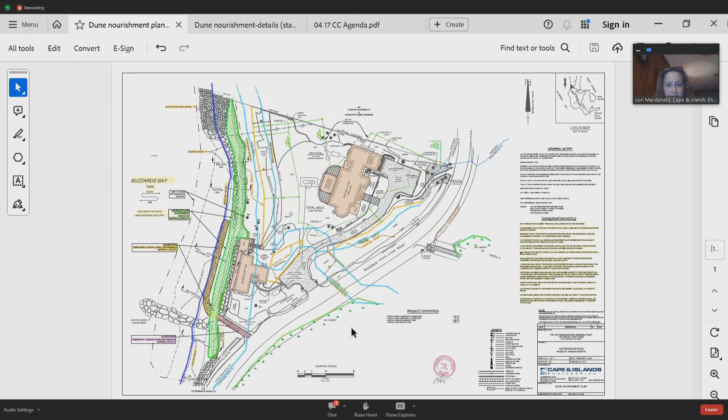Thank you, you can stop sharing. Okay, sure, yep. Sorry, I've got to figure out how to do that. So there it is, all right.

All right, Jen. Yes, Mr. Chairman, the board's seen this project, as Laura stated, multiple times in the past. I don't see the order of conditions being much different from the ones we've issued in the past.

I would recommend the board condition it so that, after the initial 200 cubic yards, if it is damaged during a storm event, then that damage be documented and submitted to the board prior to any repair of the dune, so we can keep track of how many times it's damaged.

The only other comment I have is — I'm sorry, Lori — the Falmouth Conservation Commission does not permit anything forever. Perpetuity means forever, and we just haven't made that leap yet, that we're going to forever permit something. Understood, conditions change in the field, especially along the coast. It could be quite different 5, 10, 15 years from now.

So your client can always come in for an extension. As you stated, and as it's stated in the staff report, the '95 order lasted — that dune lasted 10 years. The 2005 order lasted 5 years, to 2010, and that last order — well, the dune held for 10 years. So I think every 10 years would be fine to go back and request a new order of conditions, but you can always request an extension for a few years.

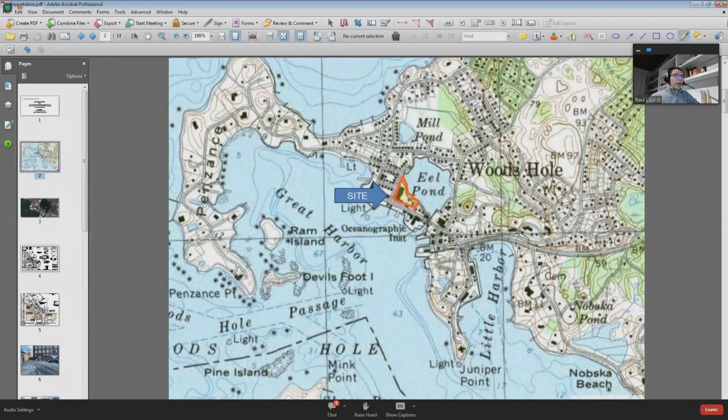This notice of intent is to permit some utility work proposed at the MBL Lillie Building facility, located in Woods Hole. I believe everybody is familiar with the site. This parcel is located between Great Harbor and Eel Pond. From an aerial viewpoint, this is the Lily Building at this location, with Eel Pond and Great Harbor nearby. The site is nestled between these two water bodies.

We filed this notice of intent with this site plan. MBL currently has two underground fuel storage tanks. This image shows one tank located in front of the garage building, and the second tank located to the side in the driveway of the garage building. Both are completely underground.

These two tanks are coming close to reaching their life expectancy, so MBL is looking to remove them and replace them with an above ground tank nestled behind the Lily Building. This building, the CSF building, houses the generator for MBL's facilities, and those two underground fuel tanks feed that generator whenever power goes out. The intent is to remove those tanks following proper procedures for removal of underground storage tanks.

This new tank is going to be above ground. The applicant proposes to install a concrete pad, shown in this detail, which will house the above ground tank, a prefab stainless steel set of stairs to access the top of the tank, and some additional accessory units for the fuel and fuel lines. All of this is within the same concrete pad located behind the Lily Building.

Between that tank and the existing generator inside this building, there's going to be some underground fuel lines. There was a question from staff about groundwater level. Groundwater at this facility is roughly elevation 1. The parking lot is roughly elevation 4 to 4.5. But if we do the installation taking advantage of low tide periods, groundwater could be at elevation -1. This fuel line is roughly 1.5 to 2 feet below the surface, so it should not be interfering with groundwater.

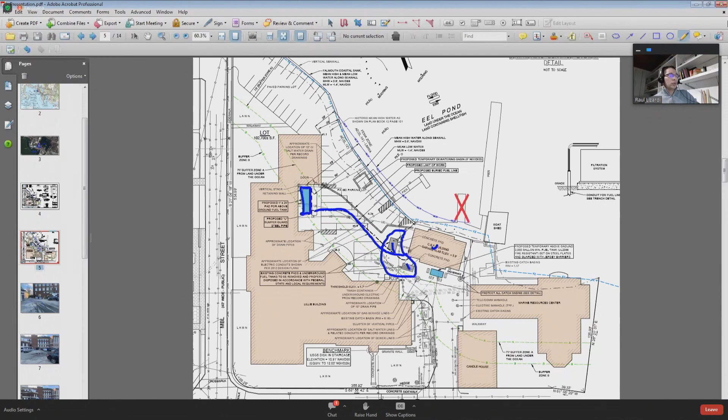The removal of these tanks, if done during the high tide period, will likely require some dewatering, so the plan does include a dewatering plan. Should that be needed, dewatering will use the same methodology as before, which is a dewatering bag contained within a filter-laid enclosure of hay bales or straw bales.

The existing site has several drainage systems, and we're proposing to protect them with silt sacks as shown in the details. We also cannot occupy the entire parking lot at MBL, since parking in Woods Hole is at a premium, so we propose to delineate only the area necessary for the work. There's going to be limited erosion control in the form of straw bales. We cannot stake them because they'll be placed on top of pavement, so we propose wrapping fabric over them and using gravel or soil to hold the fabric in place.

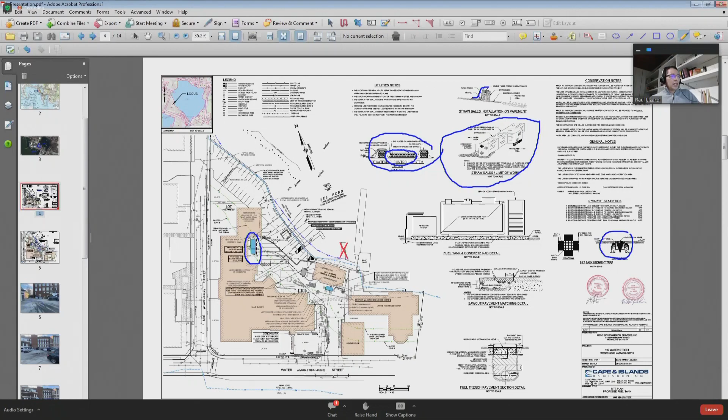And then once the installation is done and the pavement is back in place, all the erosion control measures can be taken away. So the whole purpose for this is just to replace these two subsurface tanks that are coming up to their lifespan. At that point, it will be very difficult for MBL to insure those tanks.

So having a new tank above ground is the better option for them. And in the transition between removal and installation of the new one, there will be a temporary 2,000-gallon above ground tank. The new tank is capable of 6,000 gallons, and that should be sufficient for the needs of MBL. If there are any questions, I'll be happy to answer, and Greg is also with us in case there are any specific questions for him.

All right, Mr. Murphy, do you want to add anything at this point? Okay, can you hear me okay? Yes. So Raul, thank you for that.

My only two cents is that currently there are two separate generators on the second floor of that building. Each generator is served independently by one of those underground tanks—one tank supplies one generator, another tank supplies the other generator. What we're looking to do is take those two tanks out and have one uniform fuel supply across the parking lot that will supply fuel to those two generators. The fuel will be up on the second floor of that building. Each generator has a small day tank, so the generator draws and returns fuel from an individual day tank.

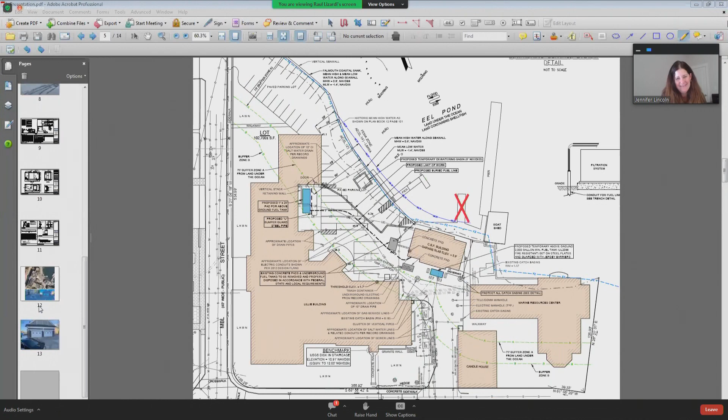If the commission agrees to and wants it, we can provide an equivalency in natives. We can't lose pavement because we can't lose parking, and the pavement goes all the way to the wall. So I guess I will probably hear what the commissioners feel about what is an appropriate offset for this. That's all I have, Mr. Chairman.

All righty. Alyssa? Thank you. I guess my only comment about potential shrubs is there is a little patch on the northern side. When you start hitting MBL Street, there's a little bit of lawn, maybe a couple shrubs. That's just my two cents. Thank you.

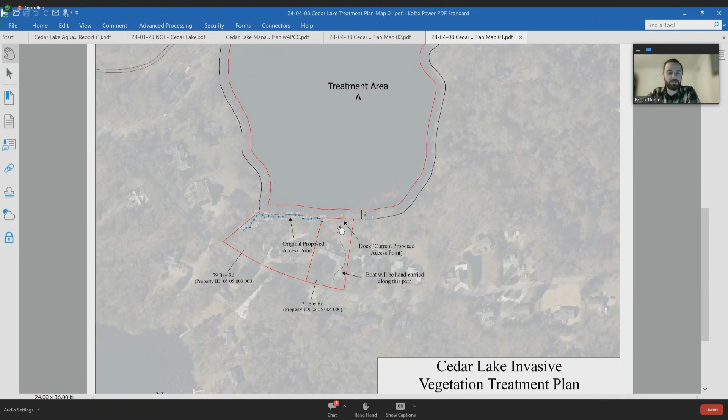They have a dock that we could use, so we would not have to walk through any wetlands. Even if there were wetlands to walk through, it'd be pretty minimal, very little disturbance. We would be hand carrying a small boat onto the dock and accessing the boat through there. All treatment would occur from the boat on the lake.

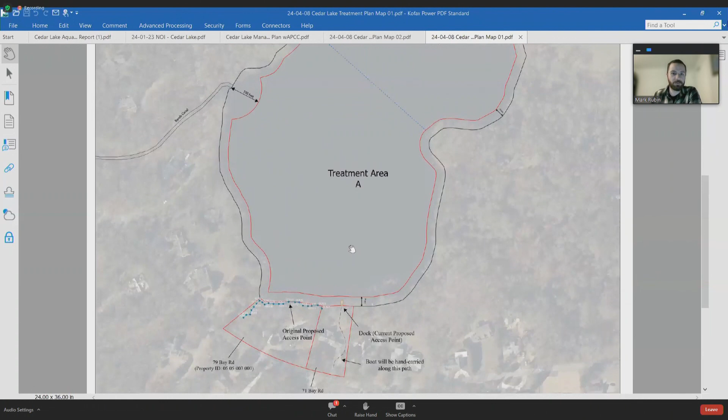On the advisement of the Division of Marine Fisheries, we have reduced our treatment areas to less than 50% of the lake each year. So we've got the lake divided into two treatment areas. First year, we would treat treatment area A. Second year, we would cover treatment area B.

In addition to that, we would avoid the littoral area, giving a buffer zone of about 30 feet all the way around the pond. At the point where Rand's Canal connects with the lake, which is the route the diadromous fish use, we would expand that buffer to 100 feet. In addition, any areas with a depth of less than 3 feet, we would not treat those directly either.

And so the first year of treatment, we would primarily just be using Sonar, fluridone. At the end of that year of treatment, we would be issuing reports to the Division of Marine Fisheries and the Commission covering any changes in the abundance of target and non-target vegetation.

They would include water quality monitoring results. Those water monitoring would take place both before and after treatment, so there would be fairly extensive monitoring during the entire course of treatment. That would be included in reports. This would also include any fish kill incidences if they happened, and recommendations for further treatment.

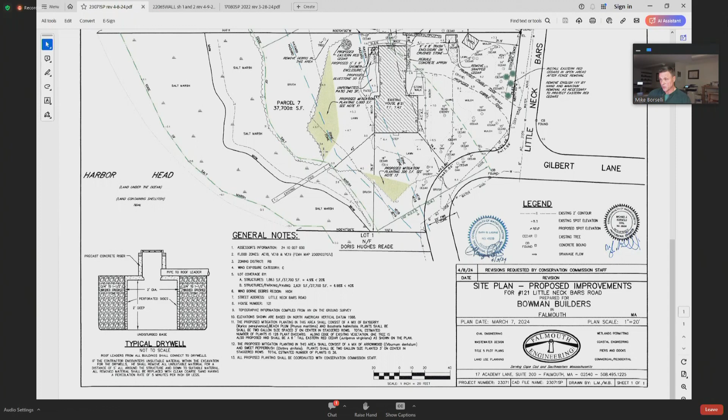And also, because of unpermitted patio construction and the installation of the new rinse station, we had to mitigate, and we proposed 1,000 square feet of mitigation planting, which is shown here in green. Subsequent to the site meeting with Alyssa and Fallon, we made a few minor edits, and I'm going to walk you through those briefly.

First of all, our initial plan had too many cedar trees, which is not very common to say, but too many cedar trees proposed to act as a screen here. Because there's already a grove of cedar trees, the number we had proposed was going to be too crowded. So we thinned out what was proposed, and we're showing four that would be staggered and planted in between the existing ones to screen out the property from Little Neck Bars Road. So that change was made.

We added a note to remove some debris—there's some firewood and brush stacked here that should be removed. There was an older permit that required an area to be planted because of when the shed was originally proposed, and it doesn't appear the planting occurred. So we've shaded this area green and are proposing an additional 300 square feet of mitigation to plant into this area. I think the original amount was 80 square feet, but there's an open area here that we agreed made sense to plant to enhance the buffer to the salt marsh.

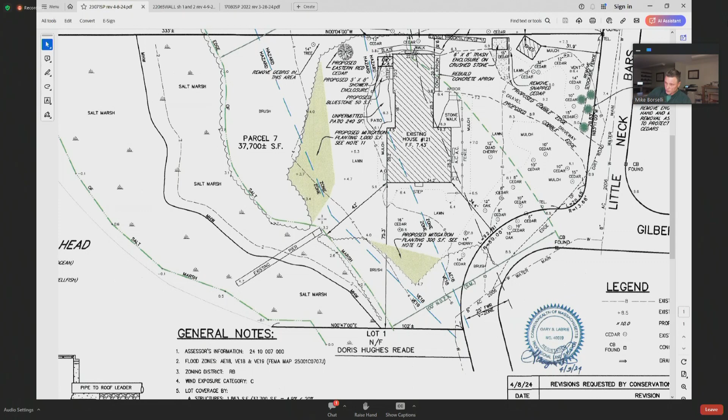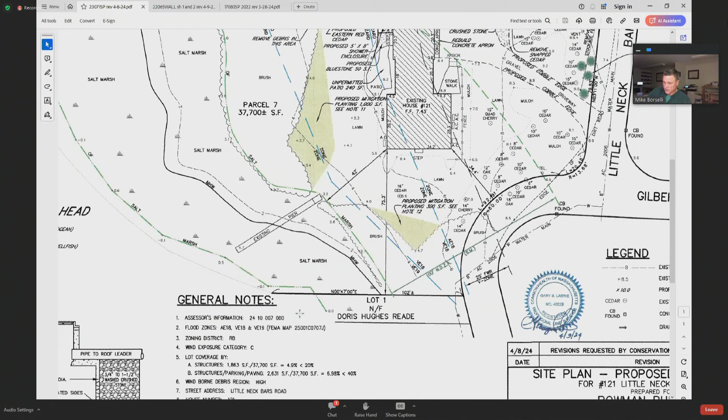We modified the planting notes for this larger area because of its proximity to the salt marsh. Your staff recommended we be specific about plants closest to the salt marsh, and we added notes about using Baccharis, since that's a predominant species here. So we touched up the notes on the plan, and we also added a note that the planting would be coordinated with staff prior to installation. I think that sums it up.

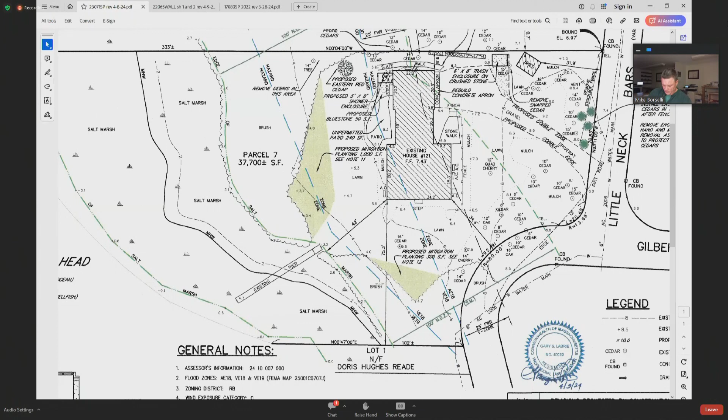I'm happy to take questions. Thanks, Mike. Jen? No, I think Mike addressed all of the staff's concerns. And yes, Mike, there is a thing that sometimes there are too many trees—it's a rare thing, but sometimes it's a thing. We want them to grow, we want them to be happy and grow and not just be all shoved together. Understood. Thanks, Mike, I appreciate you working with Alyssa and Fallon.

All right, Alyssa? No other questions. Thank you. All right, commissioner comments, Steve?

No, thank you for responding to the staff's request. I have no further questions. Betsy? Nor do I. Courtney? Me neither. Maury? I really don't have anything, but it's not in the DCPC, just outside. Ron? No, I have no questions or comments. I'm happy with it.

Jen, is there anything in the public chat function, please? Nothing in the public chat, Mr. Chairman. Thank you. Then I'm going to make a motion to close this hearing and take it under advisement.

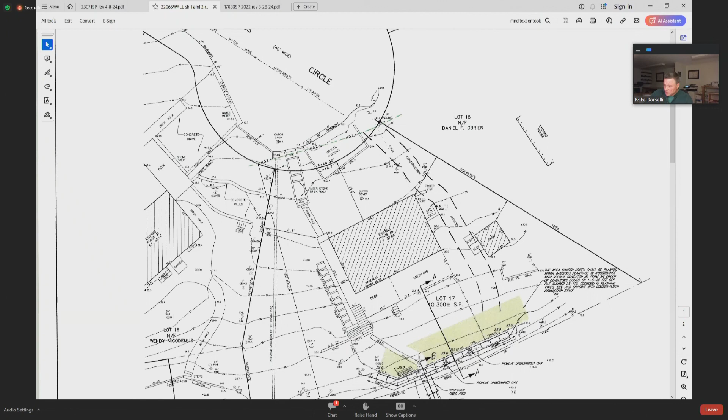The reason the hearing was continued mainly was to give us an opportunity to take a recommendation where we could reduce the amount of fill that would be proposed behind the wall. Originally, this wall was one additional block high. So we looked at that with Jen at the office, and it was suggested that that would be a good compromise, and it would reduce the amount of fill behind the wall significantly, but it would still serve the purpose of stabilizing that slope.

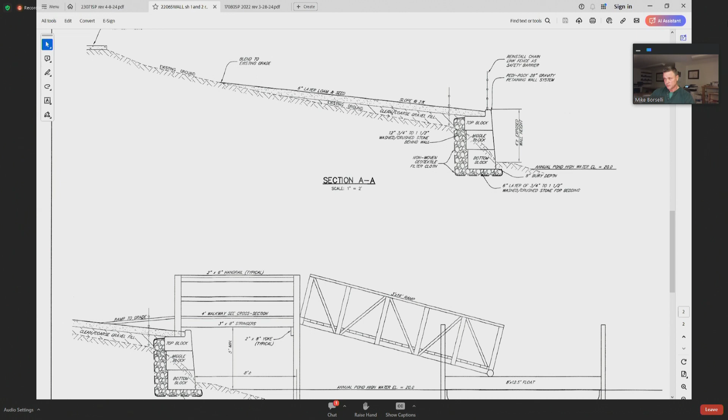So it's a relatively small amount of fill. It'll allow the only yard area for the family to be a little bit more level, so they have an outside recreation area between the house and the pond, and make for a good place to propose the dock.

Here's a cross section of what is proposed for the dock. It's basically an 8-foot elevated section of timber that would accept a ramp, and then there'd be an 8 by 12.5 foot long float, which is 100 square feet, the maximum allowed.

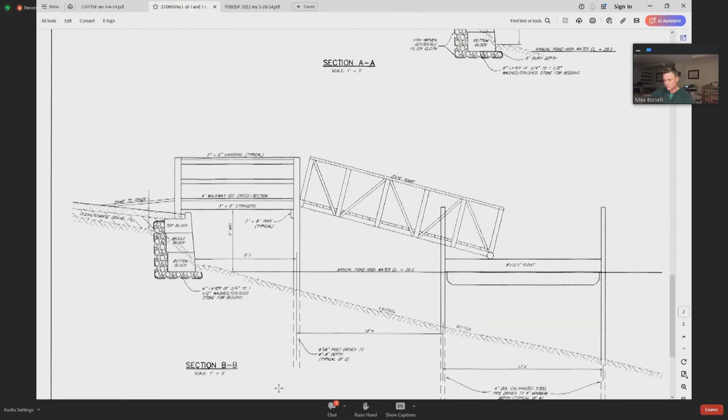That is shown in plan view here. There's a small elevated portion, then the ramp, and then the 8 by 12.5 foot float that would be sited in this position.

There's surprisingly a lot of water depth here. It's over 4 feet at the landward end, and it's 7.5 feet at the seaward end.

During the review, we were informed, unaware that there had been an original order of conditions for previous work performed back in the 80s or late 80s, early 90s, that required a buffer strip of native planting. The original plans we proposed did not show that. That planting is not in place today. Your staff, on a site visit, not only found the old documentation, they observed there's no native plantings, no 10-foot wide native planting strip.

My client wasn't even aware of that condition; it was a previous owner. My client purchased the property in the recent past, I don't know exactly when. I informed him of this, and he's accepting of that. So part of our application includes planting that buffer to the pond.

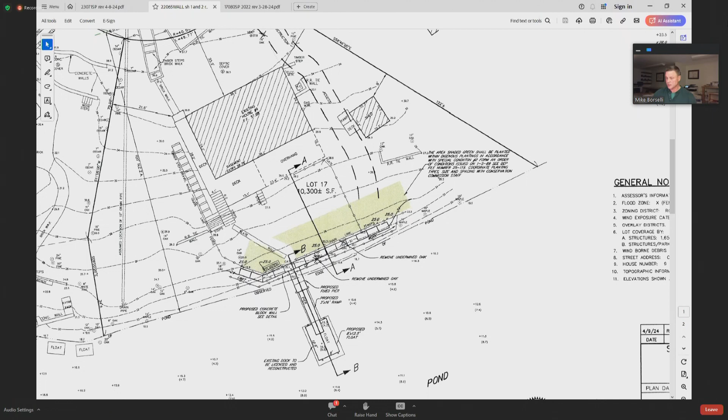Thanks, Mike. Jen? I have no comments, Mr. Chairman. Alyssa? My only comment is, Mike, at your convenience, if you can get us a copy of that stamped plan with the buffer strip on it—I think we're just missing a hard copy. Yes, I emailed it to you; I may not have delivered a hard copy. Okay, thank you.

All right, Commissioner comments, Betsy? I like this version better. Thanks, Mike. That reveals the commissioner who had comments. Right from the site. I called up Jen, we're surprised. Jen wouldn't give you up, but I had my suspicions. Well, yeah, I could see a couple other people it could have been too. But this came up and I'm like, what was it that I had a problem with this? And then I realized.

Oh, boy. Courtney? That's all I have. Thanks, Jamie, no questions. That's plenty. Kevin? No questions, Mr. Chairman. Maury? No questions. Thank you, Mike, for the upgrade. Ron? No questions or comments. Thank you. Steve? Thank you, Betsy, for setting them straight. No comments or questions. I know you or Maury or maybe Courtney even would have questioned that amount of fill. Yeah, I should have. Thank you for including me.

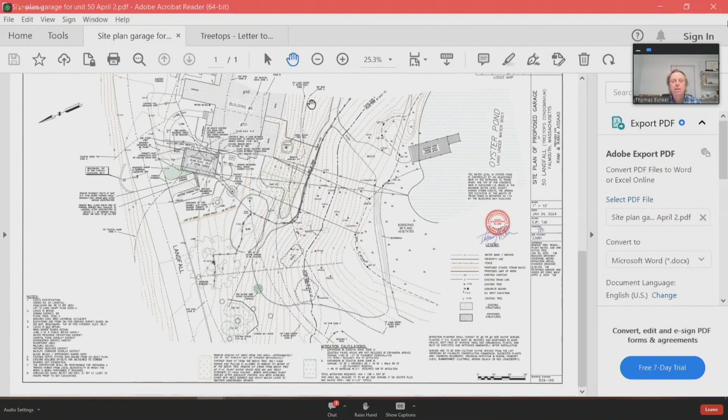One, they were concerned with the process of attaching to or cutting into the foundation of the house, being a condominium. They didn't want that to possibly run into any problems, so they wanted the garage detached from the structure.

So what we've done is pulled it away from the building and made it narrower. It was 14 3/4 feet, so it's 1.25 feet narrower than it was, with a 3-foot space between the building and the garage. There's still enough room within the existing paving to put in a 9 by 18 parking space in this location. The existing wall runs at more of an angle, so that wall will be moved, built back at an angle parallel with the pavement, making it a rectangular 9 by 18 parking space.

There's a shrub and perennial landscape bed here. And of course the driveway has moved 3 feet down along with the garage. There's still a stone step, and the association suggested a so-called person door on the side of the garage, so we added a bituminous concrete walk over this length.

Several years ago there was a drainage project around the whole area, and there's a PVC drain pipe running right through here that will be rerouted between the two buildings. Once the foundation is in, there'll be a short, 3-foot retaining wall here so there isn't a slope that might cause runoff downhill. From that retaining wall it can slope back slightly toward the roadway, or infiltrate. Four downspouts will connect into this rerouted drain pipe, and a second leaching pit will be put in this location for the added roof area.

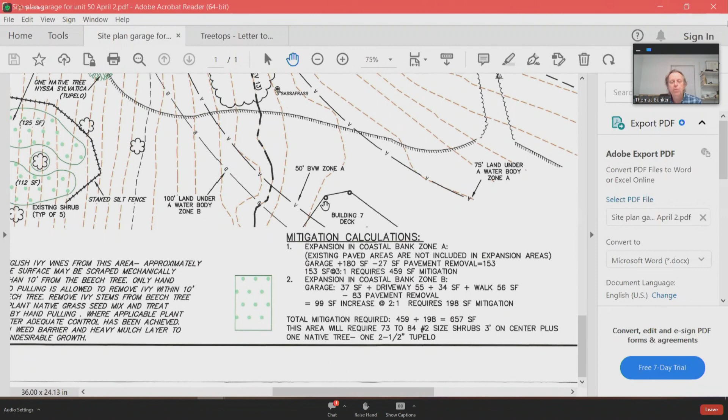The mitigation calculations come out to needing 657 square feet of native planting. At one time there was a full circle around it, but going back and forth the calculations showed slightly less mitigation needed. So we have two areas: 237 square feet of mitigation here, around some existing viburnum shrubs that were already planted - native shrubs to go around them without interfering with what's already there - and then this area has 420 square feet only, maintaining a 4-foot wide walkway through here.

The ivy, I think, was already done, but the note for that was changed so it could only be mechanical removal out here, but hand removal in this location and within proximity of the beech tree, and of course removing all the ivy vines from the beech tree by hand. So those are the changes we made, and I'll take any questions.

Thanks, Tom. Jen? Yes, Mr. Chairman - Tom, I don't have any concerns or comments with the redesigned mitigation. Although the comment letter says the Treetops board approves these mitigation provisions, your client still has to enter into an easement agreement with the board. We'll condition the project so that until we receive a copy of that easement and approval agreement, we will not sign off on the building permit. Okay, fine, thank you for that - no further questions, Mr. Chairman.

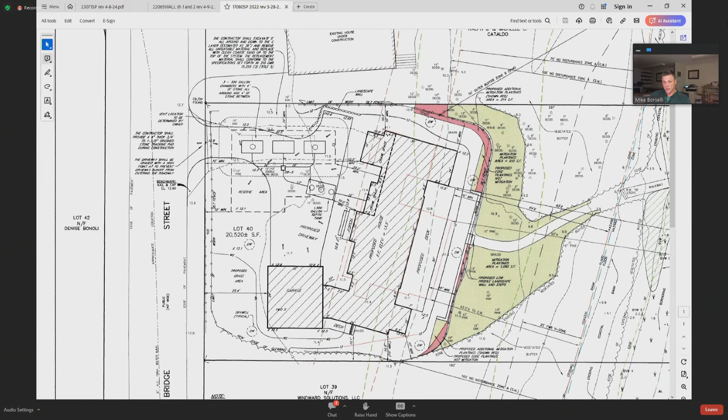That really was brief. Hello, for the record, this is Angela Tanner from Genic Studio, Crawford Land Management. And if I could have your permission to share my screen. Yes, ma'am.

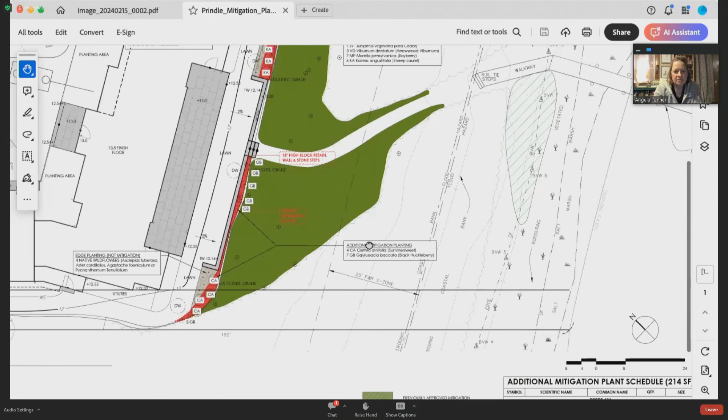So this is just a little bit more detail on the planting piece of this project, since all of this mitigation was previously designed by Blue Flax Design. We took, for the most part, the same species they are using in their plan, so we're just expanding on that, pushing the edge of it out. There's a tiny little strip right here that's not in red, and this little corner down here that's also not in red. Those are areas that cannot count as mitigation because they're within 10 feet of the house.

I had suggested to the homeowners that we just square those off and make them part of the mitigation area, so to speak, just adding some wildflowers and neatening up that edge. That's why those are shown there, and they're not in red because they don't count towards the square footage of mitigation. We've added a cedar tree and a number of shrubs. There's a couple of steps right where the path and the wall intersect. And that's all I have. I can turn it over for questions.

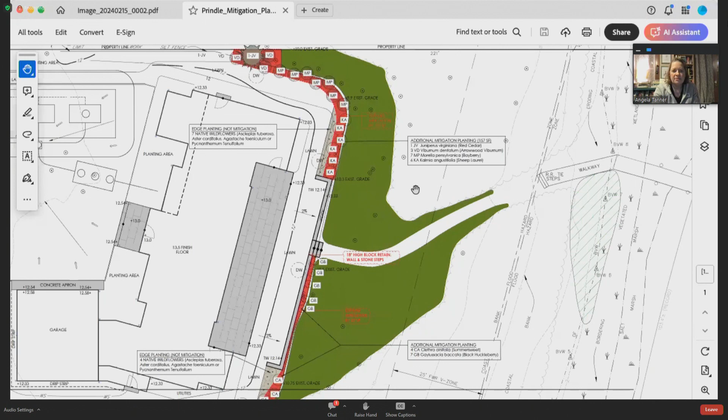Thank you, Angela. All right, Jen. I have no comments or questions, Mr. Chairman. All right, Alyssa. No questions, thank you. All right, commissioner comments or questions? Courtney, no comments. All right, Kevin. No comments, Mr. Chairman, thank you. Maury, no comments. Ron, no comments. Thank you, Steve. Thank you, another beautiful project.

Betsy. No comments. Thanks. Wow. And excellent presentations by both of you. Yes. Yeah. Yes. All right.

Jen, is there anything in the public chat function, please? Nothing in the public chat regarding this project, Mr. Chairman. You scare me when you say that for this project, that tells me there's like 100 for the next one. Any other questions or comments? I'm going to make a motion to close the hearing and take it under advisement.

Bird second. All right, we have a motion and a second to close the hearing. There's nothing further, we're voting to close the hearing.

Betsy Gladfelter, aye. Courtney Bird, aye. Matthews, aye. Kevin O'Brien, aye. Maury Carlo Hawks, aye. Ron Driscoll, aye. Steve Patton, aye. It is unanimous. We have closed this hearing.

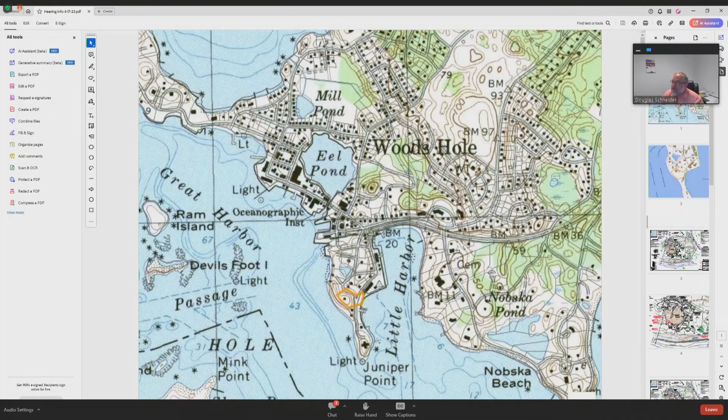Subsequent to that approval, they've come back where they would like to enlarge the approved deck on the south side. I've got a markup of the original approved plan, so just to quickly highlight the areas that are changing.

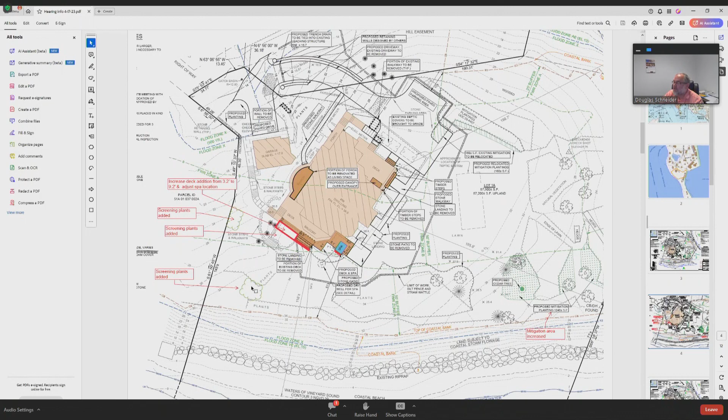We're adding some screening plantings on the northerly side adjacent to the abutter, as well as further down closer to the water where it's open to the abutting property. They just want to give a little buffer between the two properties.

And then all of that is shown on a revised plan that is submitted with a new deck area, new deck and steps, the spa, plantings, screening plantings, and then the increased area of the mitigation. All other aspects of the plans of the project stay the same.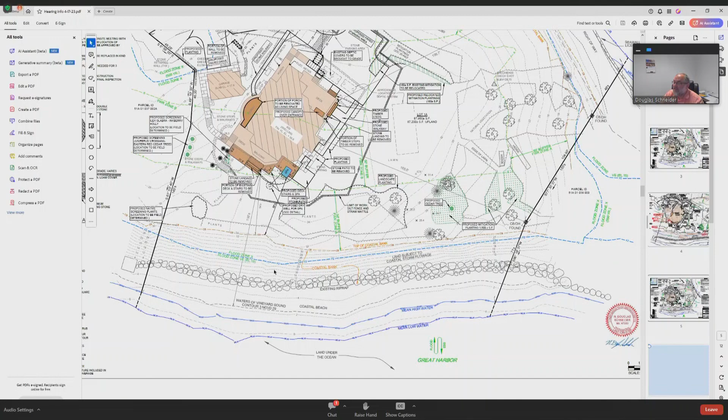Just by way of full disclosure, when the architect sent the builders the plans for other work, the builder went ahead and got started on the deck a little too soon, then was stopped immediately as soon as it was found out they had begun work on there before they were supposed to.

This is the deck as it was, and this is the deck area with it framed out to what is in front of you tonight.

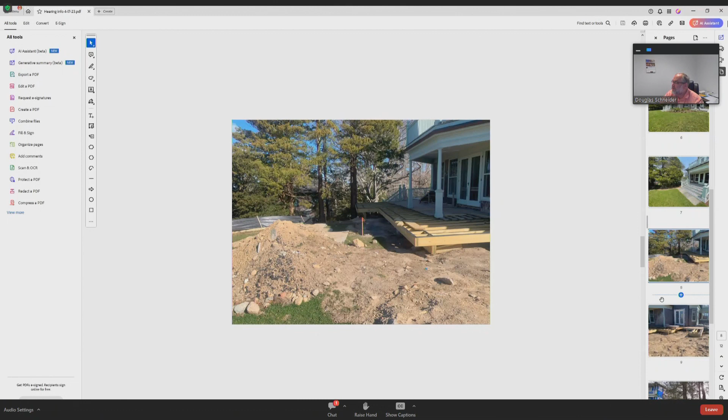Again, we apologize for the builder jumping the gun a little bit. They did it without the architect's approval, and like I said, stopped immediately as soon as it was found out it was ongoing. And with that, I'd like to stop sharing and turn it back over to you because it's late.

Thanks, Doug. Jen: No comments, Mr. Chairman. Alyssa: No comments, thank you. Maury: No comments, Mr. Chair.

Ron: Yeah, just one comment from the site. The protective barriers, they're exposed to such wind up there that some of the sticks were broken in half and the plastic was just flapping in the breeze. I don't know what else we can do, hay bales or something stronger, but in that particular case it really wasn't doing its job.

We'll make a note and reach out to the builder tomorrow, Ron. Thank you. Steve? No questions.

Fascinating properties back there, that's all. Thank you. Betsy? No questions or comments. Thanks, Doug. Thanks, Jamie. Courtney? No questions or comments. Kevin? No questions, Mr. Chairman. Jen, is there anything in the public chat function? Nothing in the public chat, Mr. Chairman.